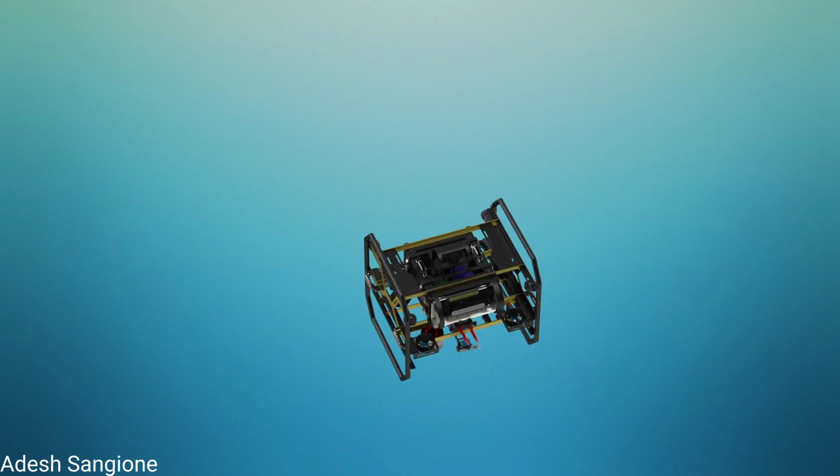A brand new robot was designed this year to accommodate 8 thrusters to provide 6 degrees of freedom, a rectangular hull, and all the needed subsystems. These major changes help improve on our previous robot's shortcomings by increasing spatial efficiency and rigidity while decreasing weight.

All subassemblies have been redesigned this year to better adhere to competition scoring. Arctos is approximately 82 pounds and is designed to be slightly positively buoyant to minimize thruster effort to keep it below the surface. It is well balanced with the center of mass and center of buoyancy in line, meaning holding of any orientation can be done so easily.

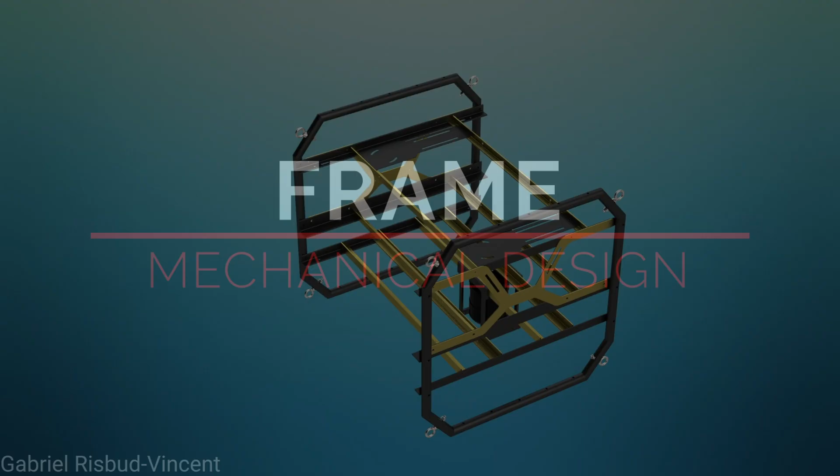The hull is encased in a minimalistic aluminum frame. This refined design uses 1-inch structural tubing and sturdy L-bars, connected with corrosion-resistant fasteners. Because of its functional design, drag forces are minimized. It remains light despite its 24 by 25 by 28 inch profile, which surrounds and protects Arctos' more delicate components.

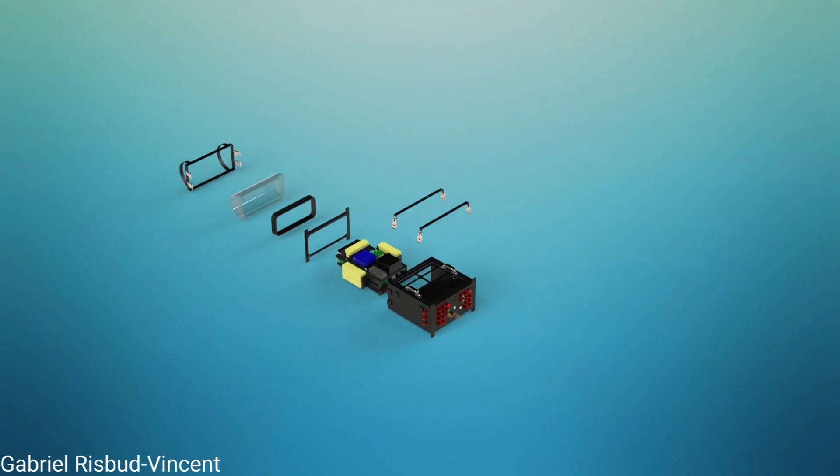The hull is the core of our robot. The rectangular aluminum design makes it compact and space efficient. This way, we are able to include 5 batteries, the IMU, the NVIDIA Xavier processor, and all boards inside the hull for central access. We can access the hull's interior thanks to our front and top reinforced acrylic caps that have double O-ring seals to prevent leakage. Lastly, penetrators and subcons protrude from the back and sides to power and communicate with our external subsystems.

The electronics are secured inside the hull using 3D printed trays for rapid prototyping and design optimization. Electronic components are separated between the top and bottom trays by function and to augment better cable management.

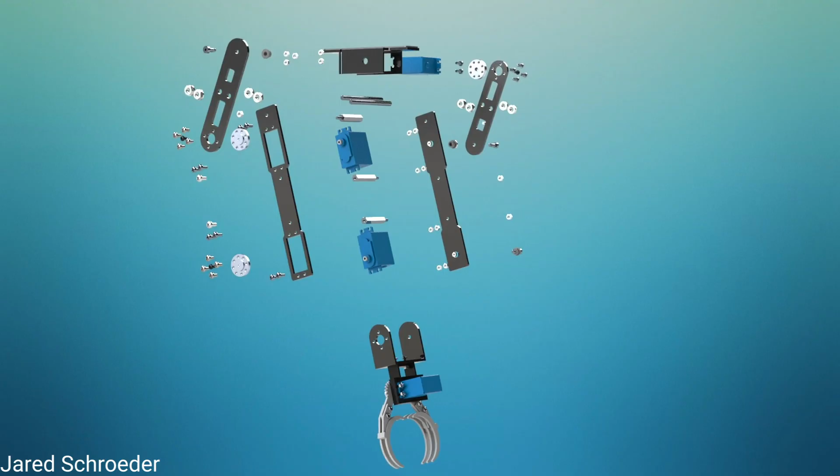The mechanical claw was one of our most exciting new additions to the robot this year. The claw was built with 3 degrees of freedom and is actuated using 4 waterproof servo motors. The arm consists of aluminum linkages connected with fasteners, giving the arm an excellent strength to weight ratio. The manipulator itself will be 3D printed using various materials to give it a strong grip while maintaining its structural integrity.

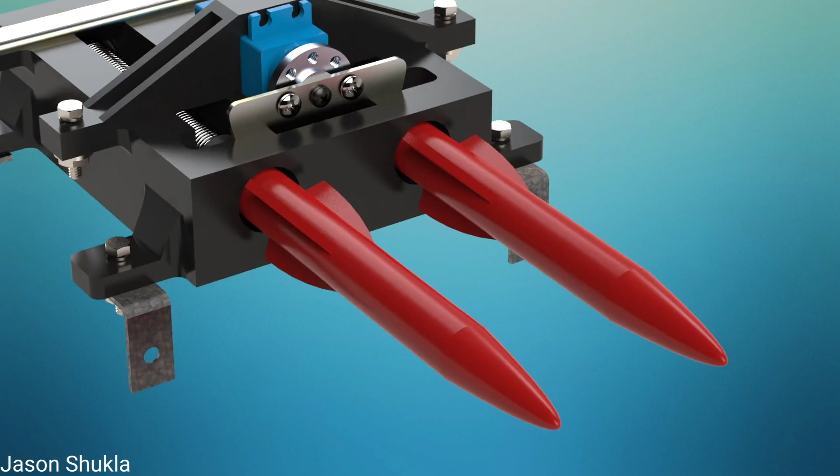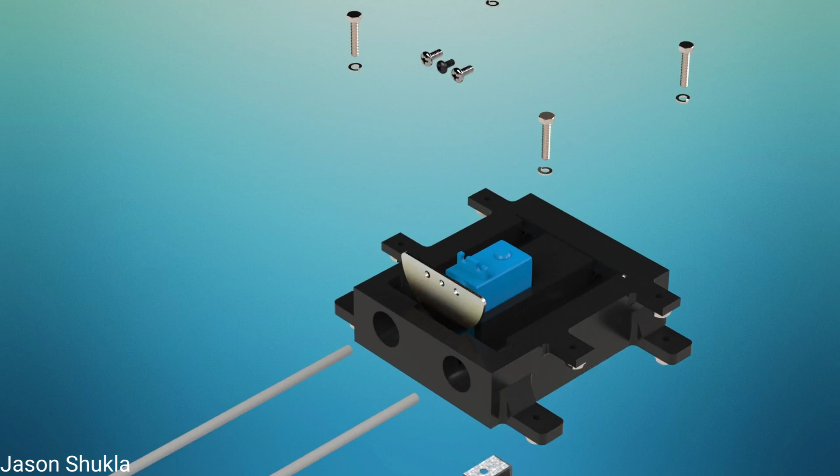We redesigned our torpedo launchers this year, building on previous malfunctions and shortcomings. We transitioned from a design involving CO2 canisters and a pressurized chamber to a design involving spring-loaded torpedoes. This design eliminates the risk of leaks while reducing the weight of the torpedo's assembly considerably.

Those G-men stand no chance.

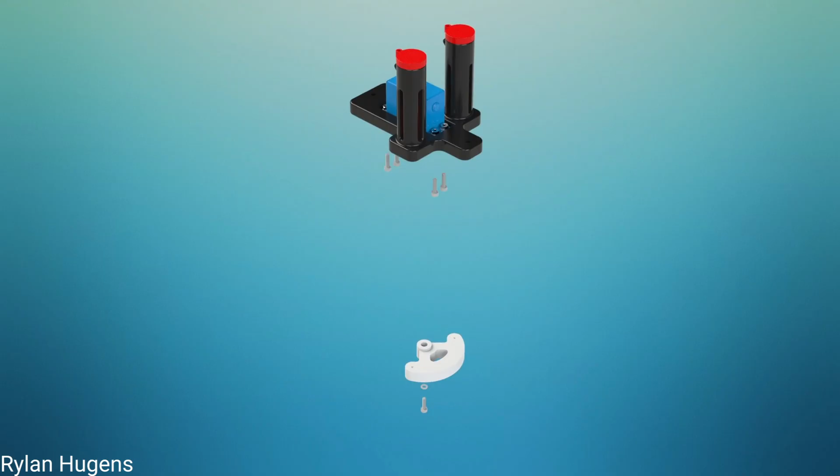The new marker dropper's assembly has a 3D printed body and is actuated using a waterproofed servo motor. The design is simple yet functional since each marker can be controlled individually.

To locate our merchandise underwater, we need a camera that faces downwards. This friction-fit assembly made of clear acrylic, PLA, and aluminum provides our fisheye camera with a secure 180-degree view.

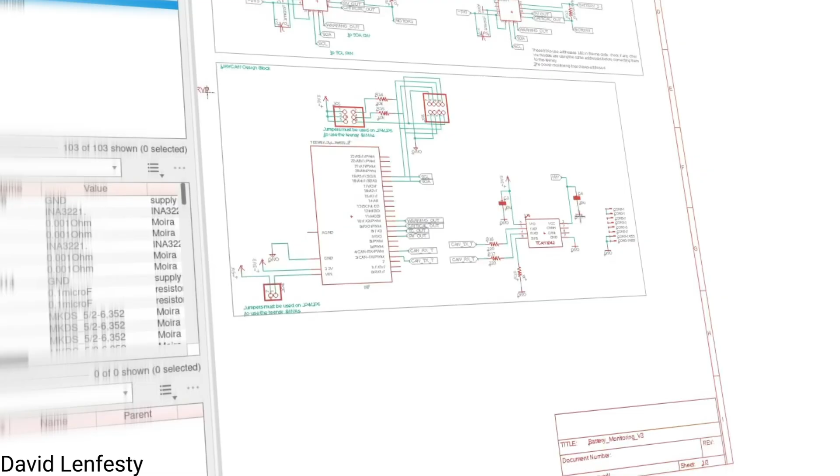Our main focus this year has been maintaining stability and porting the existing electronic systems to a new platform. Before that platform can go anywhere, it needs some form of propulsion. This is provided by 8 Blue Robotics T200s, powered by Zubax brushless ESCs.

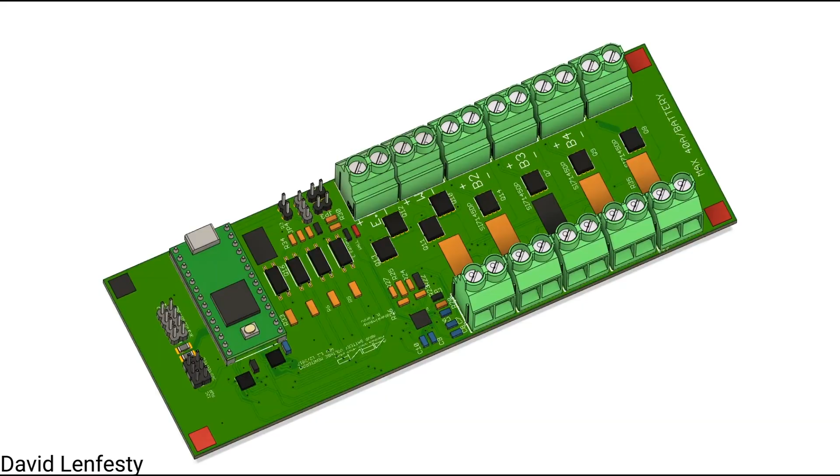Power is provided by 5 lithium polymer battery packs, one for every pair of motors and another for subsystem power. Each battery is routed through a custom battery monitoring board that monitors voltage and current, giving us real-time insight into power usage and preventing excessive draw on the batteries.

With automatic input switching for the internal electronics, we are able to keep the core systems operational on the dock as we debug, pull data, and perform maintenance. This allows us to reduce wear on the batteries and continue to be functional for longer periods of time.

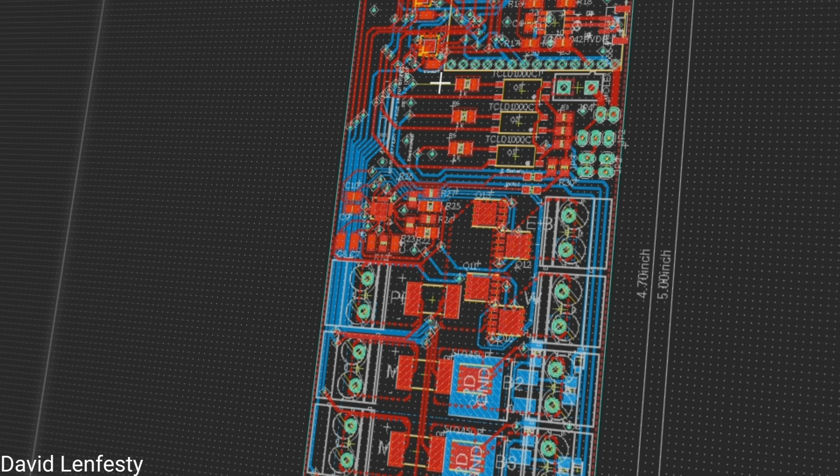An experimental feature this year is a battery leveling technology, which allows us to dynamically pull system power from different batteries, allowing for greater operation time and battery usage.

System power is then further regulated into 3 rails, 12 volts, 7 volts, and 5 volts, by modular pluggable power connectors. And of course, in case the G-Man gets to us, we also integrate a magnetic kill switch into the hull, cutting power and allowing us to make a quick escape.

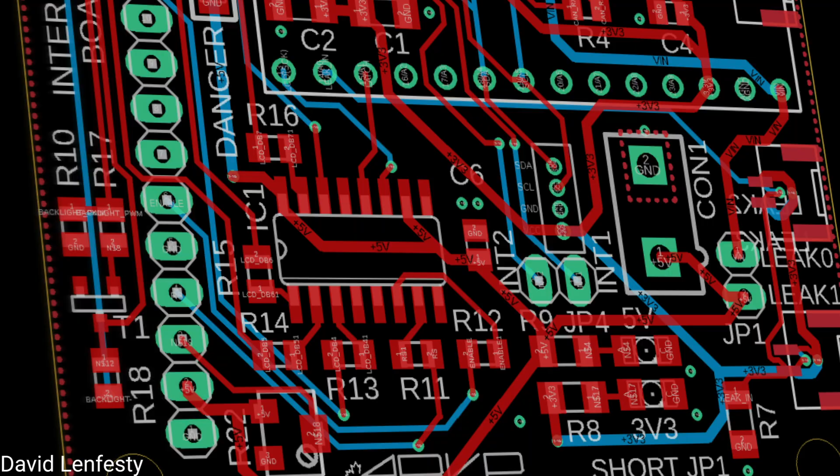And to detect if a run-in with the law left us worse for wear, there is an internal environment monitor, which monitors temperature, pressure, and leak sensors distributed along the hull. These measurements allow us to test for leaks before diving, before they become too serious in the pool.

The torpedo actuator board was designed for self-defense, manipulation, and diagnostics. With a total of 12 servo channels, it gives us flexibility to run any servo-actuated system, such as our torpedoes or our actuator arm. We also have LED outputs that allow us to view the robot's state without a connection.

In order to help us find our way, we also have an array of 4 passive hydrophones, coupled to our own sonar preprocessor board, which filters and amplifies the hydrophone signals and sends that data to the Jetson for processing to determine the pinger location.

All of these systems then communicate over a single CAN bus, governed by the flexible UAVCAN protocol, giving us highly reliable and low latency communication and control backend, with Ethernet used for the high-speed data transfers.

The purpose of the software team is to enable Arctos to maneuver itself to a desired goal using the tools given to it by the electrical and mechanical teams. To do that, we have a 3-stage software pipeline: we perceive our environment, set a goal, and then act on that goal.

Our sensor suite allows Arctos to measure depth, velocity, acceleration, and orientation with the assistance of a depth sensor, Doppler velocity log, and inertial measurement unit.

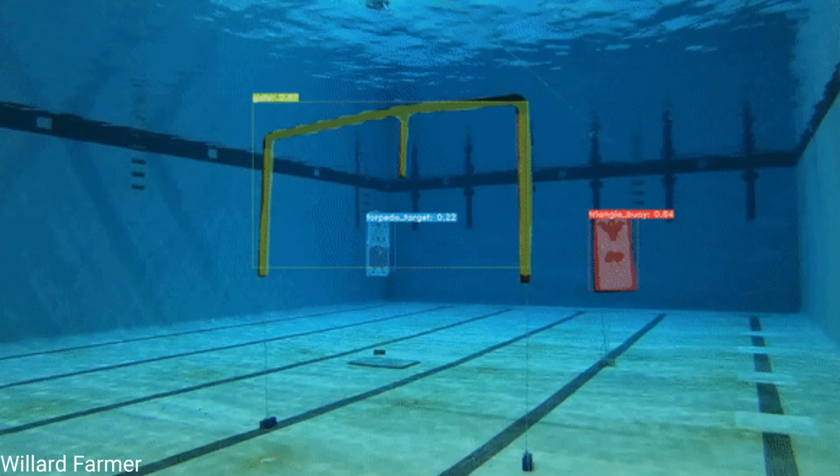Arctos uses neural networks YOLO-V3 and YOLACT to see its environment. These achieve rapid object detection and instance segmentation respectively. Our new ZED stereo camera now allows us to measure distance and generates a mesh of 3D objects on the fly.

For state estimation, we have a mapping system that combines sensor data to create a map of the competition area. This includes Arctos' position as well as the various props in the pool.

We have a robust mission planner that accounts for task failures and unexpected events, ensuring the robot accomplishes tasks within the given time constraints. Even if the robot fails a task or cannot find an object, our mission planner ensures Arctos will keep on going. It is very easy to use and is able to create missions for any scenario.

A positional goal from the mission planner is converted into a series of velocity goals over time. These velocity goals are then inputted into an LQR control system which controls the thrusters to reach velocity goals.

Our LQR control system has reached a strong level of maturity. It uses a mathematical model of Arctos and a linearized dynamic model of the underwater system to reach velocity goals. This system allows for simultaneous control in every direction and is readily able to account for physical changes to Arctos, such as adding a camera or sensor.

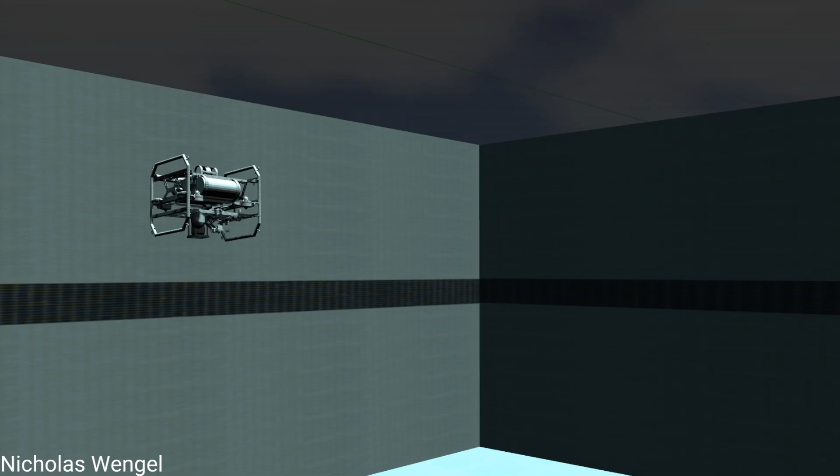Our most important tool is the simulator. It allows us to test outside of an actual pool in a realistic, simulated environment. We can simulate sensor data, test the accuracy of computer vision algorithms, measure how well our mapping system converges to a simulated environment, and use our mission planner to run practice missions.

This year, we migrated from our older UW Sim simulator to Gazebo. This has been instrumental in testing Arctos' ability to interact with objects where collisions and manipulation are required. Gazebo also has a timescale acceleration factor, allowing the testing of long missions in very short periods of time.

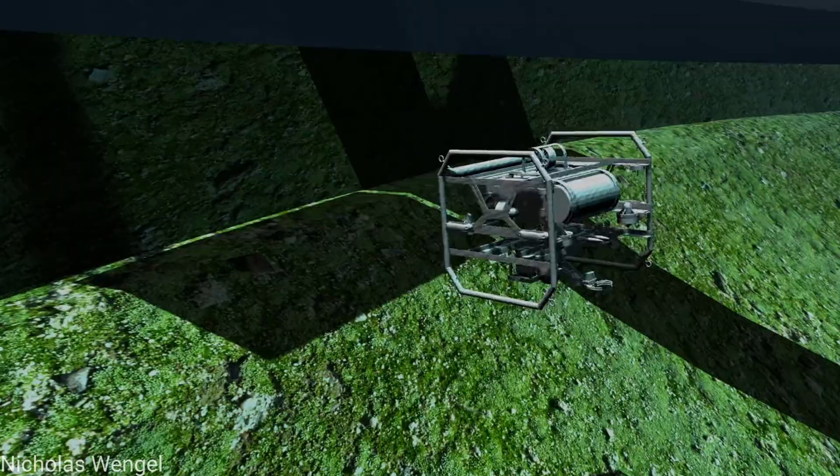Working remotely has been a challenge. We've been forced to overhaul our documentation. The wiki tool Bookstack allows us to organize and create internal documents. Hosting Bookstack on our web server makes it easily accessible for all of our members.

Since we can no longer participate in face-to-face outreach, our website has become our primary platform. Our previous website was 5 years old and difficult to maintain, so this year we have decided to overhaul it with the Oxygen Page Builder.

Our new task management tool, Trello, allows us to subdivide large projects into small, bite-sized tasks that can be assigned to individual developers. This has increased our focus, productivity, and has allowed us to quantify the work we are doing. We can visualize how many task points and pull requests we accomplish per week in Google Data Studio.

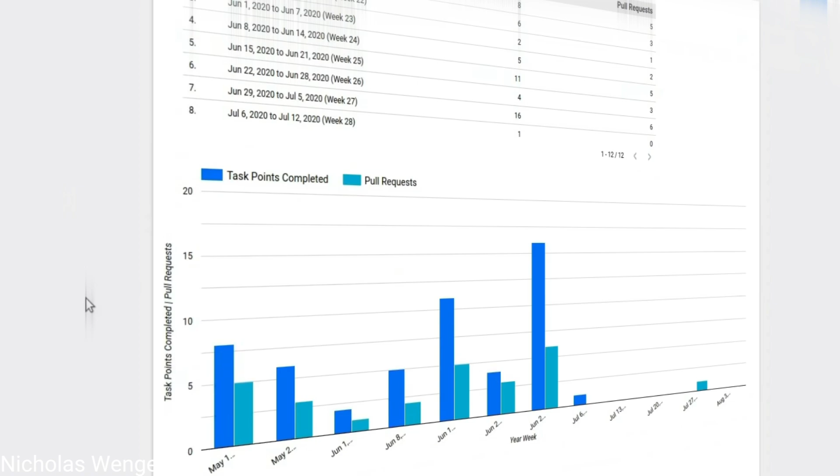We use Docker and Travis CI to build our codebase and run a suite of tests every time a developer makes a code change. This ensures that our code builds and works when we release it to Arctos.

Well, boss, here you go. Here's the merchandise.

Well, we did it. Nothing more rewarding than a well-engineered solution to a relevant problem.

Boss, gentlemen, just letting you know, Prohibition has just ended, so we don't even have to go and get that bottle. We can just go and buy some more. I'll leave now.